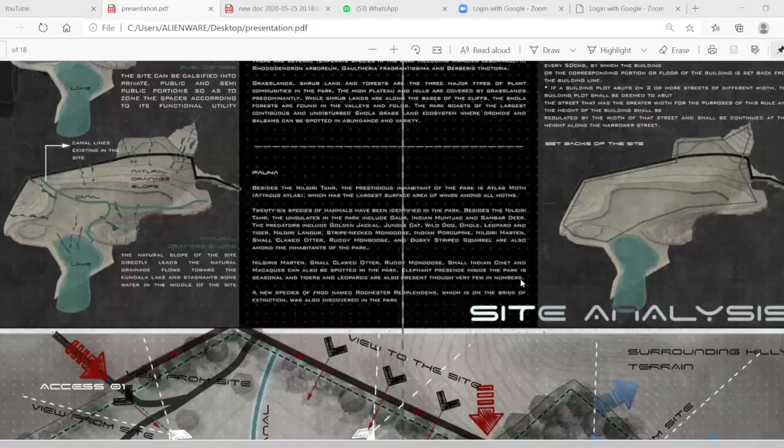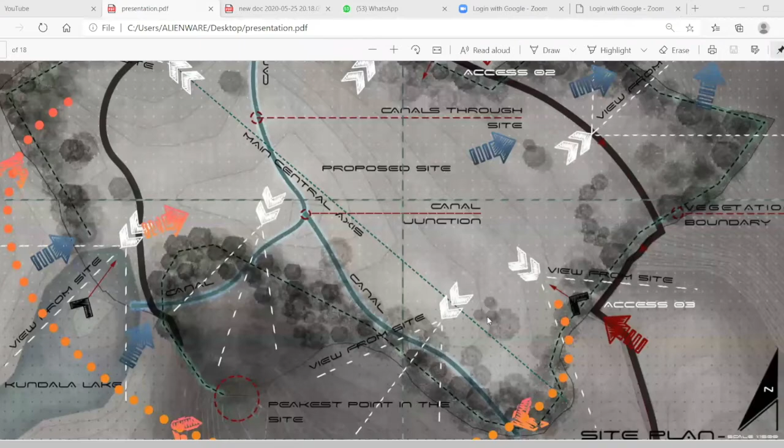The site has mainly 2 axes: axis 1 and axis 2. Axis 1 has more public approach and axis 2 is a private approach for the official owners of the site. The site has mainly 4 gradual high sites, and a main central axis connecting the 2 existing axes of the site.

Now from the inferences of the site and of the case studies, I have zoned the site accordingly. The site is divided into two extreme regions for the Rain Experiencing Center and Weather Research Center, since the purpose and function to be served are different - one is for leisure and the other is for education.

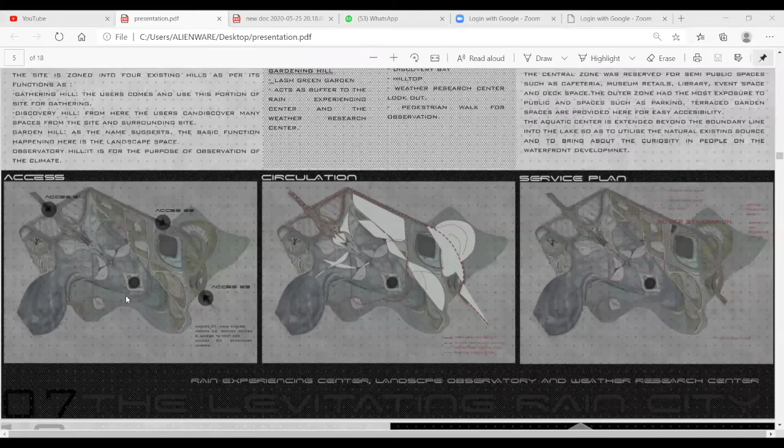Then the site was zoned as 4 hills: the Gathering Hill, the Garden Hill, Observatory Hill, and Discovery Hill, on the basis of their functional classification. An internal water system is zoned towards the center of the site, since it gets waterlogged most of the time. The site as a whole has a central spine connecting all the activities, providing a focal perspective to the project, with all functional activities aligned on either side of the central spine.

While talking about access to the site, there are mainly 3 accesses: access 1 for the public, access 2 for service, and access 3 for local and foreign official scientists, mainly for the weather research part. This whole project is zoned according to its access for easy accessibility.

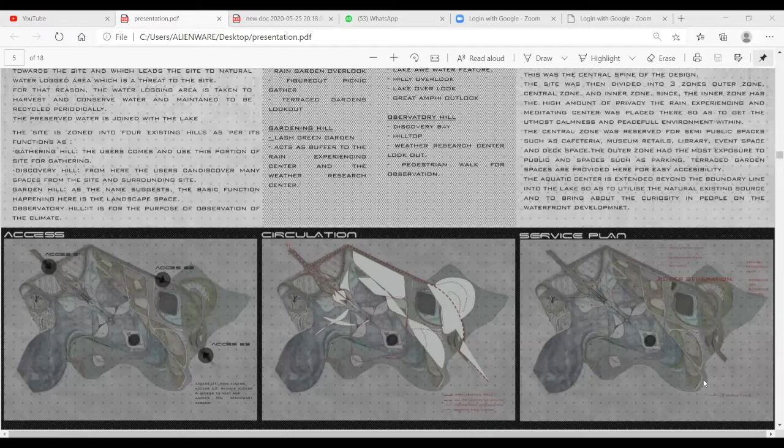The circulation pattern around the master plan is given in the following map, and the basic service plan is portrayed in this plan. Now coming to the master plan, the main part of the site is the internal water system, the artificial internal water system, which is set to be at level 0 and taken as a reference for all other spaces.

We have the main access from the northwest side of the site for visitors from level plus 6 meters above the water level. There is a narrow central spine running throughout the activities. There is a main entrance leading to a drop-off point at level plus 3, and the drop-off point splits the users to the parking area, which is at level plus 6, on either side by vehicular ramp.

This is a vehicular ramp, and there is a pedestrian ramp on either side of the parking area to connect people from the parking lots to the main central ramp running through as a spine among the spaces. There are 3 podiums given on either side of the spine: podium 1, podium 2, and podium 3.

Podium 1 is for parking and is set at level plus 6 meters from the water level. Podiums 2 and 3 are for public gathering, serving as a terrace for people to hold before entering the building. Podium 2 is at level plus 3, and podium 3 is at level 0.

The central pedestrian ramp runs from level 6 and descends 10 meters down, immersing into the water and leading to the underwater general spaces building at level minus 4. On either of its sides...

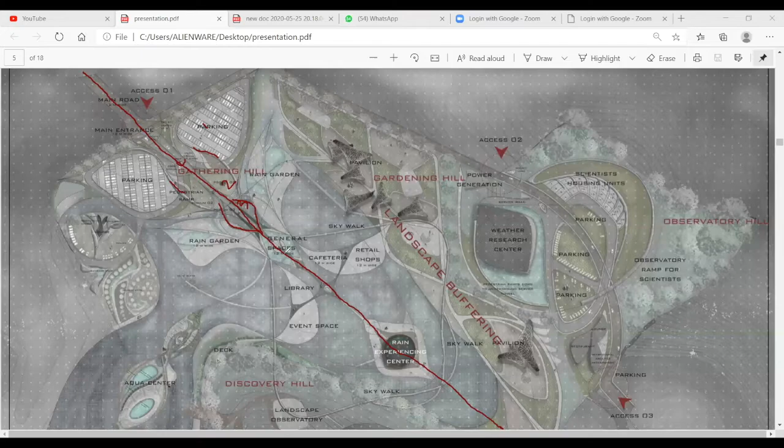This is done in order to enhance the focus on the rain experiencing center and create a sense of curiosity. The Hall of Fame is set on the rooftop of the general spaces building to provide focus on the rain experiencing center, which leads to the floating rain experiencing center.

The general spaces building at level minus 4 meters leads to an underwater tunnel, which leads to the natural rain room at level minus 4 in the rain experiencing center.

There is an aquatic complex in the southwest part of the site extended towards the Kundala Lake. There are accommodation units on the western side of the site in order to attain proper views of the lake and privacy, set for people who come for accommodation for the meditation part.

Now coming to the weather research part, it is set totally apart from the rain experiencing center.

This part consists of a scientist parking space, service parking, weather research center, accommodation units, scientist housing units, an observatory ramp, and recreational and restaurant blocks.

Another pedestrian ramp runs to the rear of the weather research center and leads to an underwater tunnel for underwater maintenance and services.

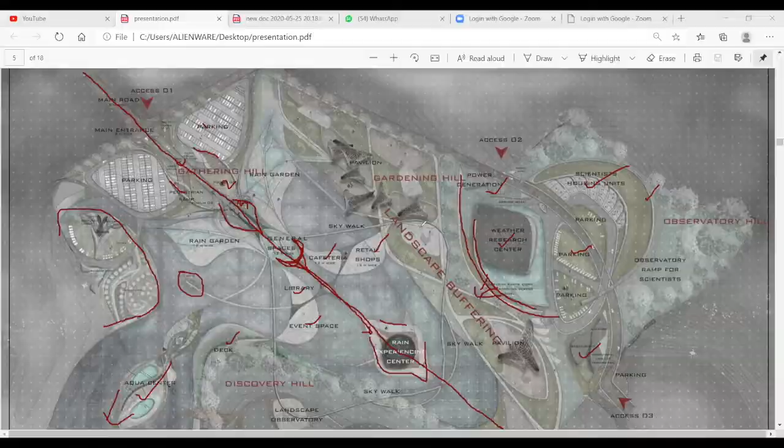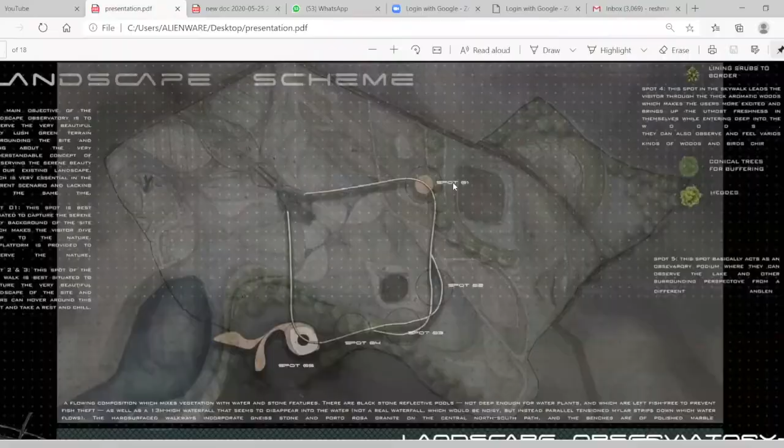The landscape observatory, given as a skywalk, has different spots at different levels to observe the whole site, the trees and birds, and the serene picturesque surrounding landscape.

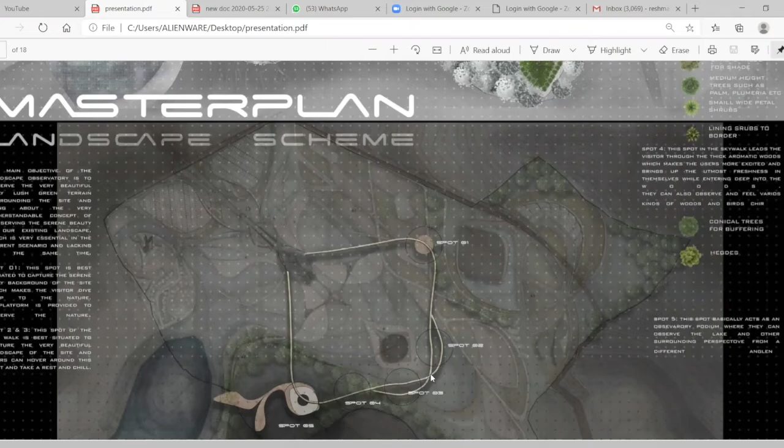It starts from level 0 and rises up to level plus 50 from the water level. The skywalk takes us through different spots, passing through woods at spot 4 and leading to spot 5, a hanging observatory deck to observe the lake.

Now coming to the Celtic meditation island, its main purpose is for natural meditation, creating an extravagant space for people to come for their meditation.

Now the rain garden is provided on either side of the Hall of Fame. It is beneficial for many reasons: it improves water quality, controls flooding, and creates aesthetic landscaping sites. This is a 3D view of the master plan.

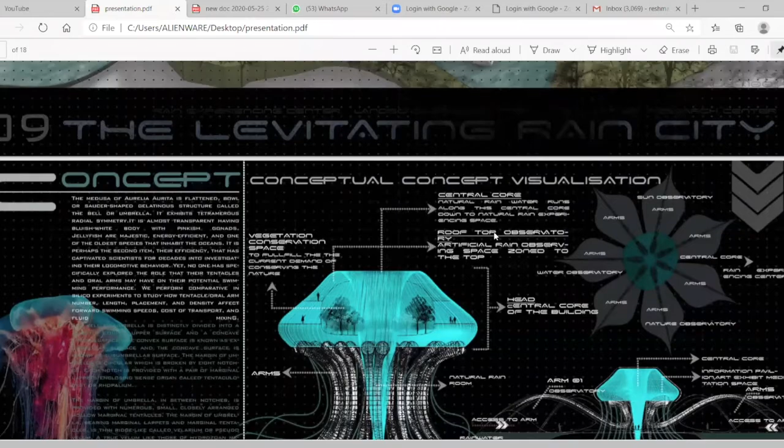Now coming to the concept: my concept is Aurelia aurita, basically a jellyfish. The medusa is a flattened, bowl-shaped structure exhibiting radial symmetry, which is best suited for the rain experiencing center and meditation center to be.

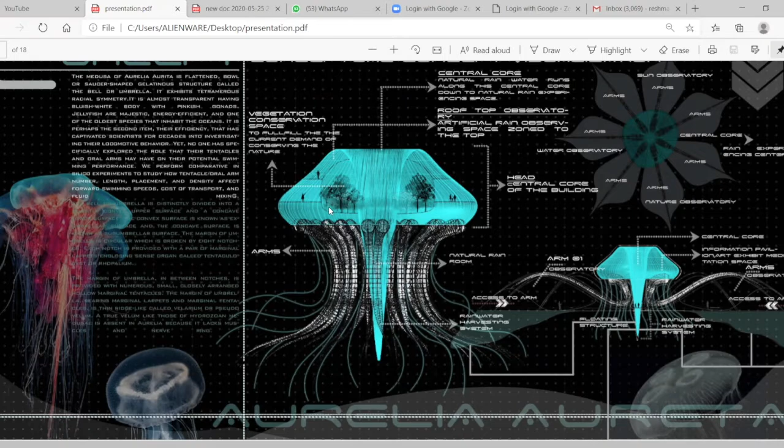It has a transparent body, similarly taken into the structure. Looking at the structure, the top portion of the model is considered the head, centered by a central long extruded hole through which natural rain goes down. Surrounding this is a vegetation conservation space, with an artificial rain room and galleries concentrated around it.

The arms act as different galleries exhibiting the conservation of different elements of nature like sky, nature, and water. At the bottom of the central core lies the natural rain room, with rainwater harvesting below it.

The concept used in the master plan is fluidity.

Coming to the special topic, my special topic is liquid architecture.

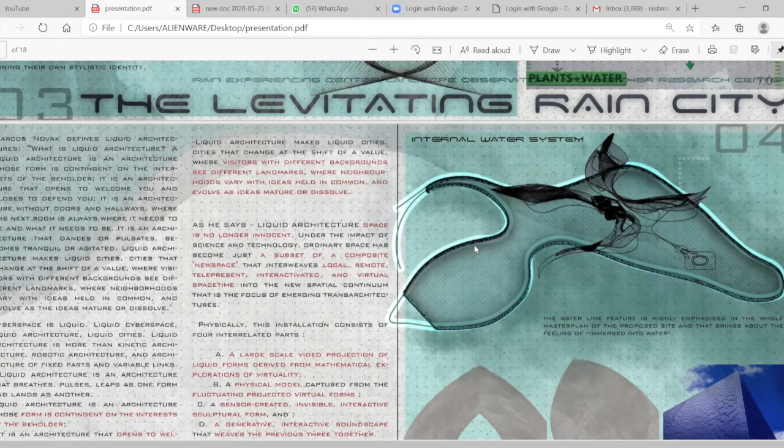The techniques shown in the images are used to bring about liquid architecture, creating an interplay between light and water in the interiors. The internal water system in the master plan enhances the water line of the whole project.

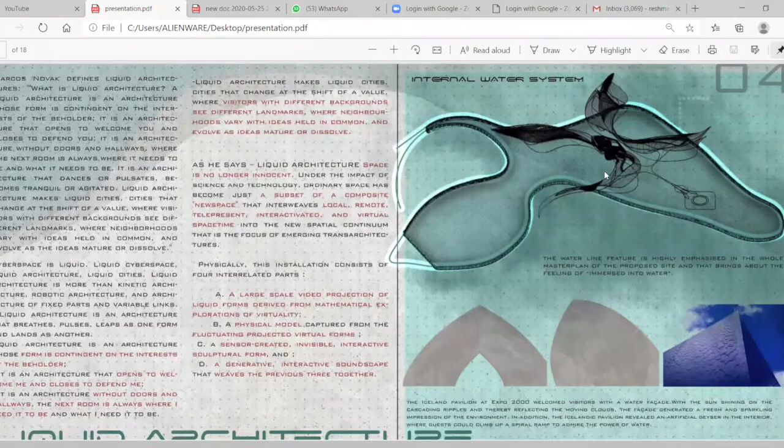Coming into the details of the general spaces building, the main central axis extends down to the general spaces building entrance, followed by visitors' lounge on either side, topped by a fixed transparent water body and directed towards the central courtyard, in which the reception is cantilevered to the central courtyard and becomes the figure for its courtyard ground.

A ramp runs around the central courtyard to access the rooftop of the general spaces building. There are waterfalling features on either side of the lounge space. There are male janitor, female and disabled janitor space, service room, storage and utility staff lounge, conference room, and VIP lounge.

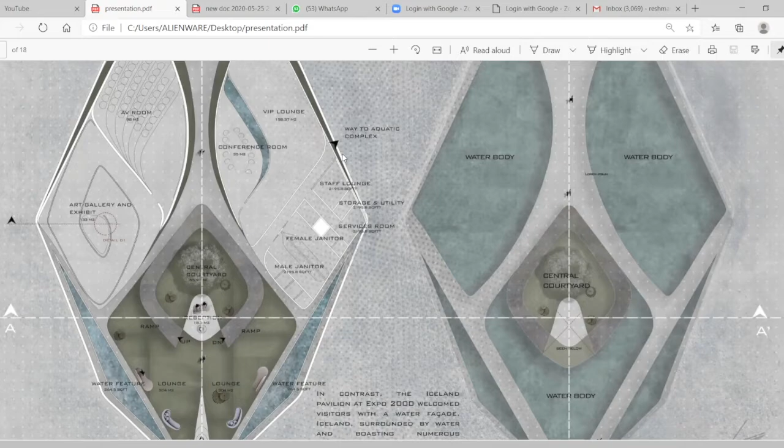On the right side portion of the building, the narrow corridor takes you to the aquatic complex, rising from the underwater level to the water level. There are art galleries and an AV room on the left hand side of the building. The central narrow path leads to the underwater tunnel, which leads to the natural rain room.

Now, look for the roof plan. It is approached by a pedestrian bridge from level 0. Rooftop is accessed by a ramp from the general spaces building ground and is fully fledged with water, taking you to the niche of the Hall of Fame, as you can see in this figure.

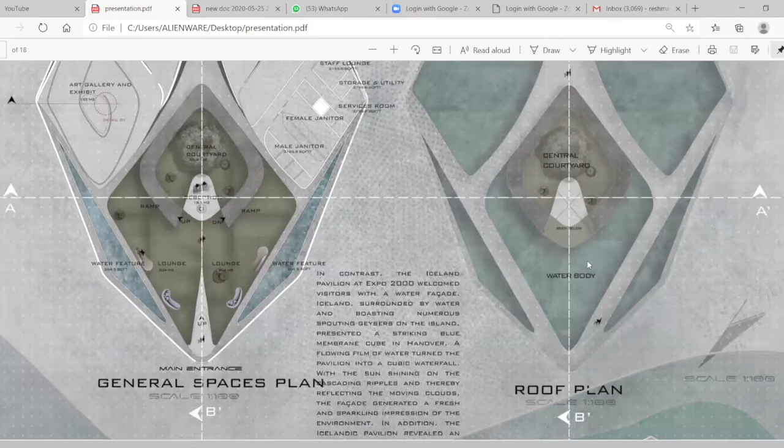Now, coming to the Rain Experiencing Center. The general spaces lead you to the natural rain room through an underwater tunnel. Concentric to the natural rain room, you have passenger corridors split into 3 main accesses.

Each access races to 3 different galleries to observe and experience 3 different elements of nature: sky, water, and nature respectively. These 3 galleries are accessed with escalators, and rise to the water level, raising at each step. Those sky, nature, and water elements have their beauty enhanced and focused to the central narrow split gap in the roof and sides.

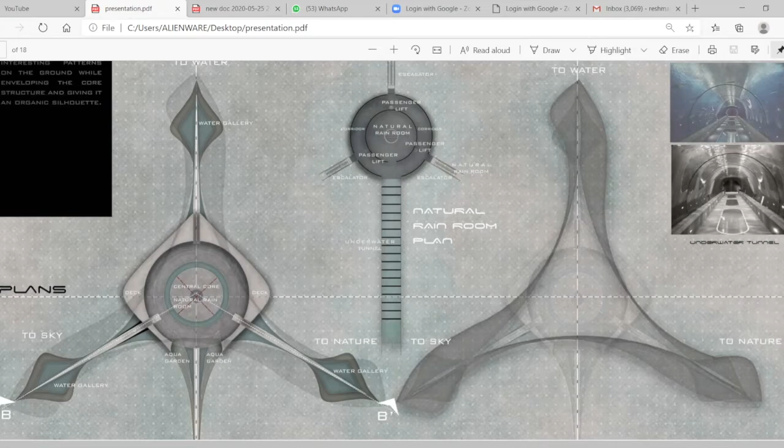Coming to the podium plan, the podium level is at the same level as the water and is accessed from the central spine. Spaces provided are the aqua garden, floating deck, and central core where the vertical lifts can be accessed, and at each access respective water galleries are provided.

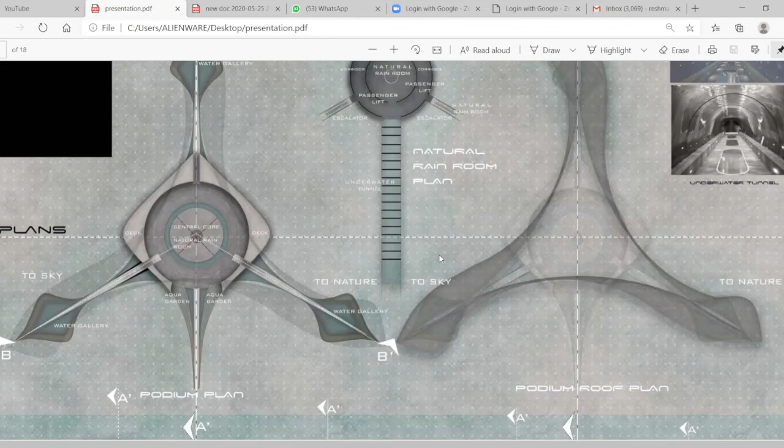When the rain experiencing structure is considered, it is plated into 4 levels according to their functions. The uppermost level is the artificial rain room, approached at the light room immediately after exiting the lift.

There are 3 meditation levels provided. In each meditation level, the meditation deck is placed concentric to the central core, which radiates into a vegetation space.

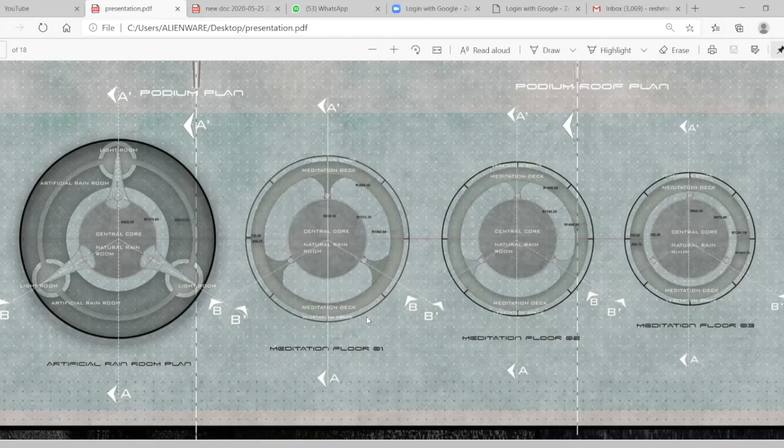As you can see in the section, a visitor is led through the underwater tunnel to the natural rain room. From the natural rain room, they have vertical panoramic lifts and passenger lifts upward, and they have mechanical floor down and a rainwater harvesting tank beneath the mechanical room.

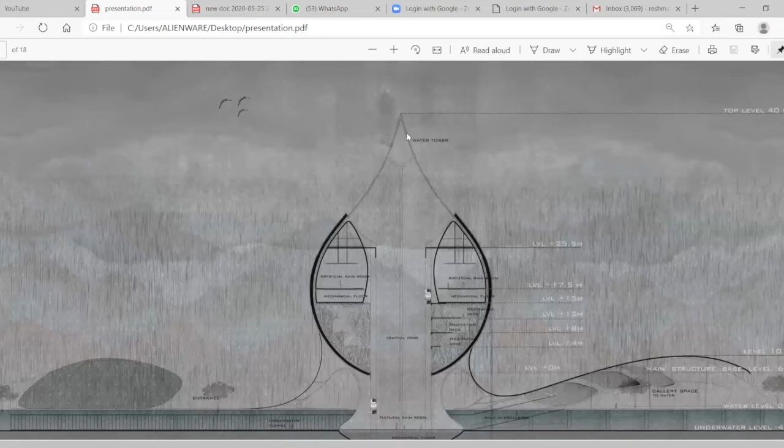Coming to the aqua center, a narrow floating path leads to a curvy, long, narrow avenue lined with long conical trees, with aqua gardens on its either side. Changing room and restroom are to the right side, and thermal spa and sauna to the left side.

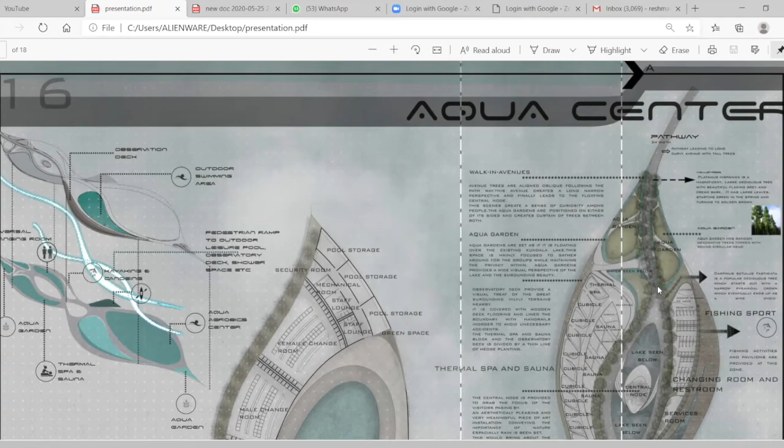The path leads to a central node which is said to be floating in the lake, and the path divides into 2 ramps. One ramp goes down to the aqua aerobic center, and one ramp goes up to the outdoor leisure swimming pool and observatory deck.

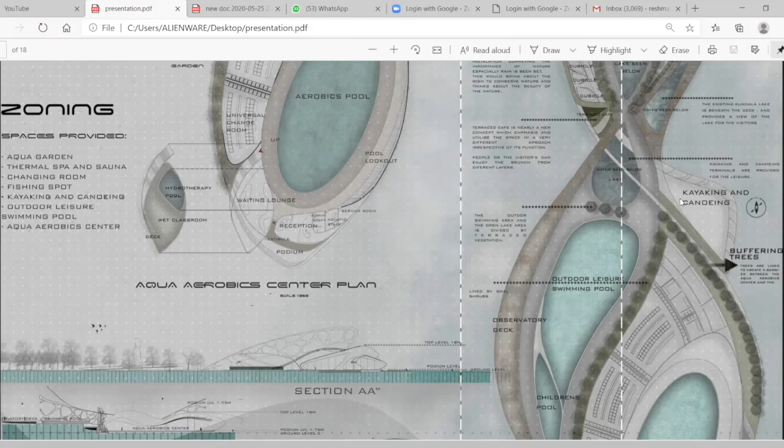And the children's pool. There is a kayaking and canoeing area in the middle node, and you have an aquatic garden at the end, which seems to be immersed into the water, giving visitors a feeling of going deep into the water. Coming to the aqua aerobic center plan, the whole structure is placed on a 1.75-meter podium.

There's a vestibule, entry, and reception to the right, admin staff and aquatic staff room and service room to the right, and waiting lounge to the left. And beside the waiting lounge, there is...

There are stairs down to the mezzanine floor, which contains a wet classroom and hydrotherapy pool and deck space. To the right, there is a pool lookout to observe the activities.

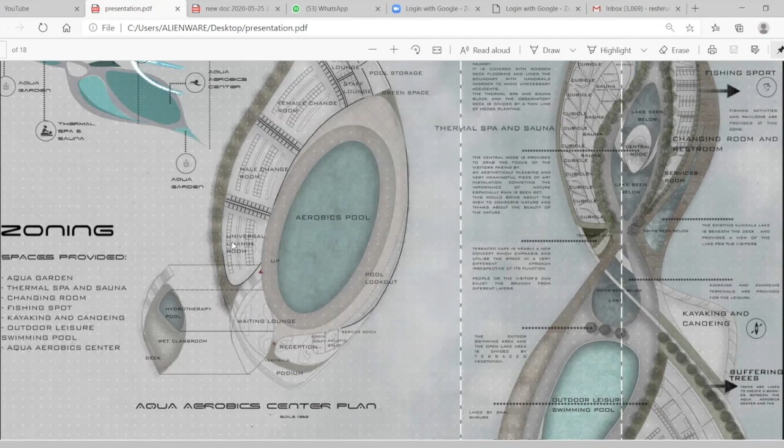There is a universal change room, male change room, and female change room, curvilinear to this pool. And there is a security room, mechanical room, staff lounge, pool storage, etc. The ramp in the aquatic center stays twisted.

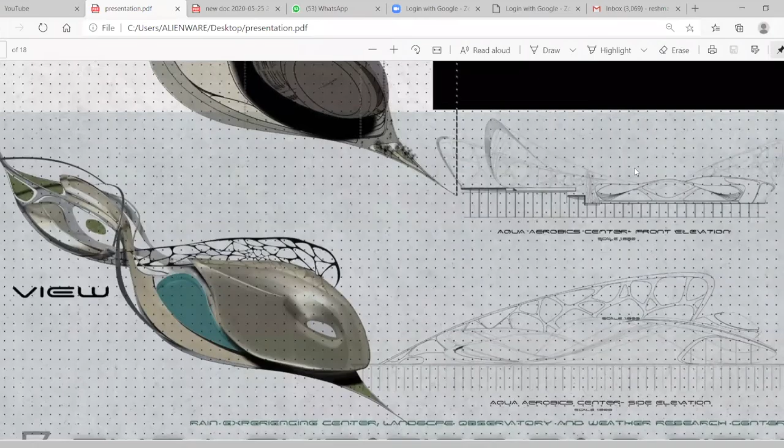This is the section of the aqua aerobics center. This is the exploded views and elevations of the aqua aerobics center. This is the elevation of the aqua aerobics center, and these are the 3D views. This is the 3D view of the aqua aerobics center as a whole.

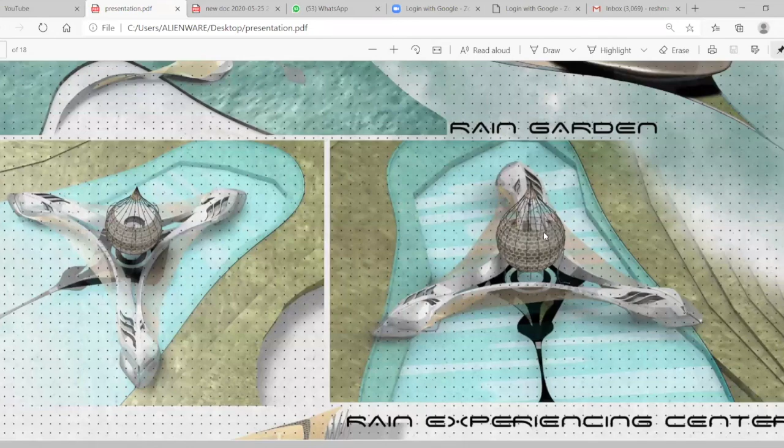This is a 3D view of the rain garden, cafe, retail shop, and Celtic garden, and the Rain Experiencing Center structure, showing how the approach is, and this is the 3D view of the whole master plan.